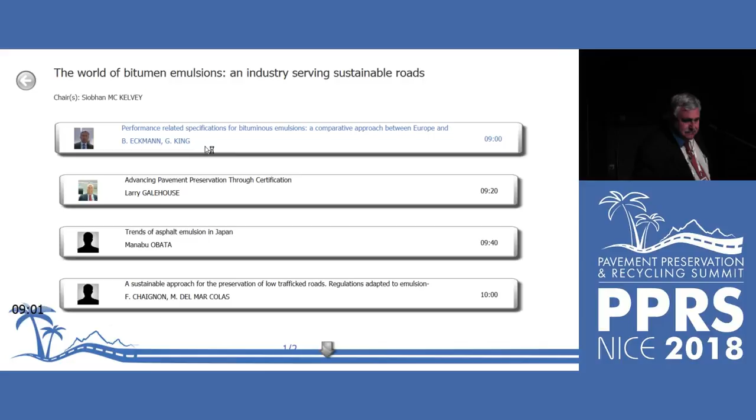the three main initiators of the PPRS event itself.

I hope you've had a successful few days so far. It's certainly been a very busy program, long days, but maybe you've also had a little bit of time to enjoy the beautiful city of Nice.

I'd like to thank the team at IBEF for inviting me to chair this session, entitled World of Bitumen Emulsions: An Industry Serving Sustainable Roads. It's a pleasure to be here. I know a lot of work has gone into making this happen, so thank you to everybody involved, and also to all the speakers this morning who are going to keep you animated for the next two hours, even though it's very warm in this room.

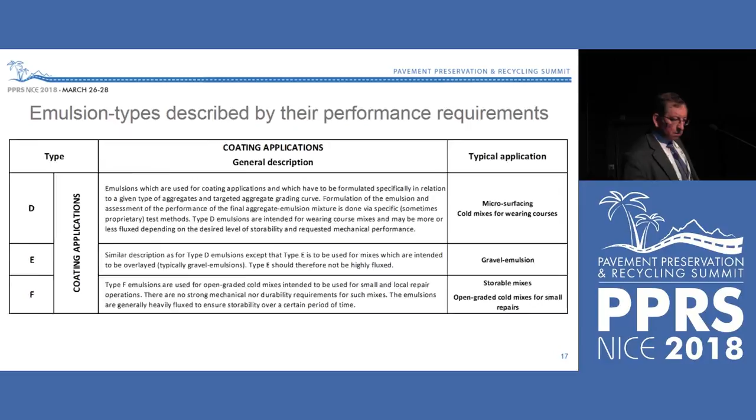I'd also like to take the opportunity, before we start, to remind you a little bit about IBEF and its mission. The International Bitumen Emulsion Federation is a platform dedicated to bringing together associations and organisations within its membership that are specifically related to bitumen emulsions from all around the world. It's committed to promoting and continuing the best use of emulsions, sharing information on experiences and best practices related to standardization, technical performance, health, safety, environment, and development of bitumen emulsion applications.

I know we had a great session yesterday in the Agora seminar. This morning you're going to hear more examples of best practice and sharing of information.

For those of you who don't know me, I was the acting president of IBEF for the last three years, but I actually ended on Sunday. I handed over my role to Galen Baumgardner. I can't see Galen, is he here? Are you here, Galen? No, not yet. Galen represents the Asphalt Emulsion Manufacturers Association in the US.

I was elected president three years ago at the very first PPRS in Paris, for those of you that attended that. I've learnt a lot. I think together we've achieved a lot, and I would like to thank again everybody in IBEF for the support they've given me over the last three years. But going forward, I'm sure that during his tenure, Galen will also be able to continue the excellent work.

So, for the next two hours, we're going to be looking at a very special world, the world of bitumen emulsions. For me, it's really important to have this focus during the PPRS.

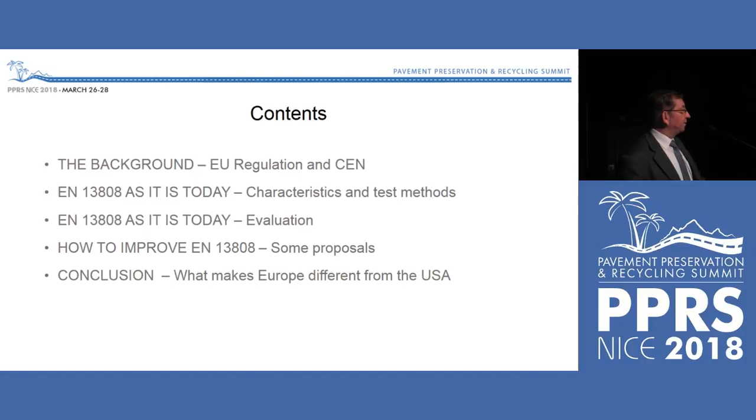We'll try to be as short as possible in answering the question of whether EN 13808, the European emulsion standard, will ever be a performance-related standard. To answer that question, we will first explain the background, show EN 13808 as it is today, make a critical evaluation, propose some improvements, and finally try to answer the question.

The background is the European Construction Products Regulation, which applies to all EU member states. Its main objective is to remove barriers to trade by putting construction products under the so-called CE marking process. An underlying driver is that construction works must satisfy a set of up to 7 basic requirements.

To enforce this regulation, the European Commission has given mandates to CEN, the European Standardization Committee. For road construction products, it's mandate M124, which identifies the basic requirements to be considered for bituminous emulsions. The task of CEN technical committees is then to propose essential characteristics and test methods by which you can fulfill those basic requirements. That's the answer to the mandate on which the product specification is finally built.

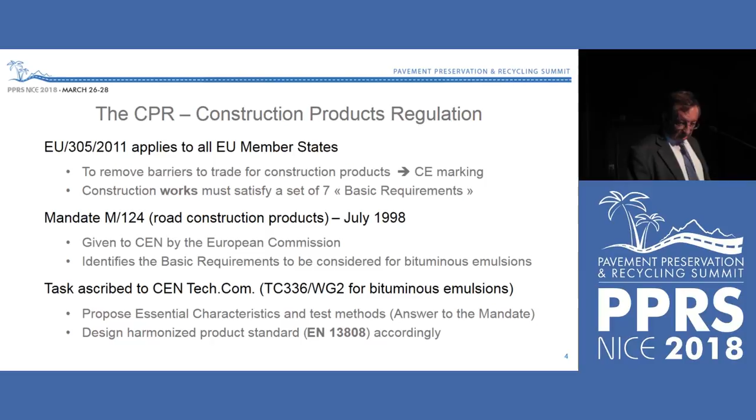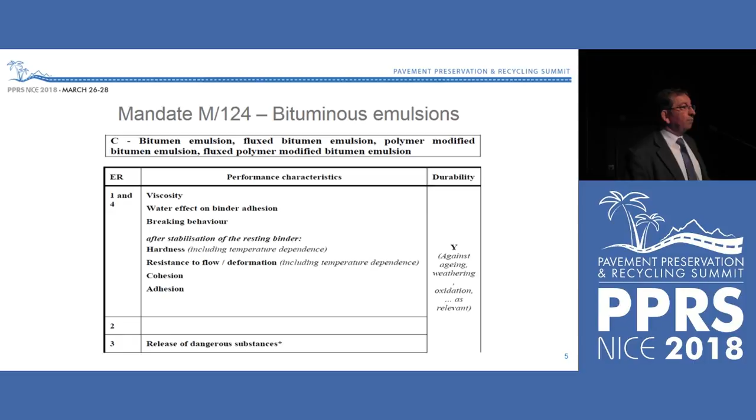This is an example of how it looked. This is the mandate, and here you can see requirements on the emulsion, viscosity, and so forth, and mainly mechanical requirements on the residual binders, including durability.

That brings me to the description of EN 13808 and to explain what these essential characteristics are, which have been identified in the answer to the mandate. Some relate to the emulsion as such, like viscosity or breaking behavior. There are also the so-called filler tests.

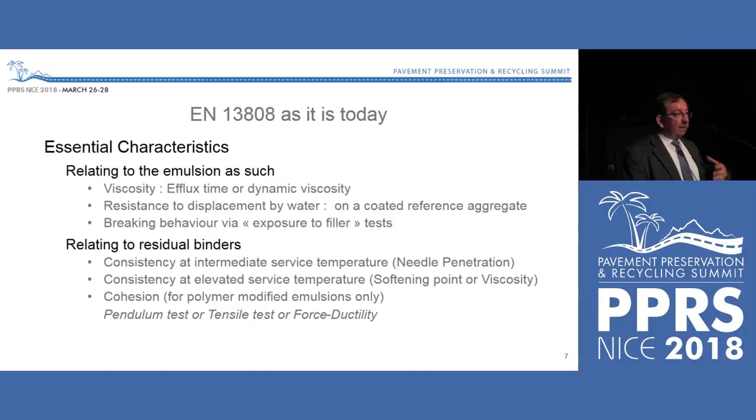Most relate to residual binders, mainly requirements on consistency in relation to temperature, and also cohesion for polymer-modified binders. Nevertheless, there is a refinement in that these residual binders are considered at different stages of the emulsion's life.

The first stage is the product once it's on the road. You have sprayed it, laid it, and the water comes out. This is reproduced via a so-called plate curing test, and this binder is assumed to be the initial binder just once on the road.

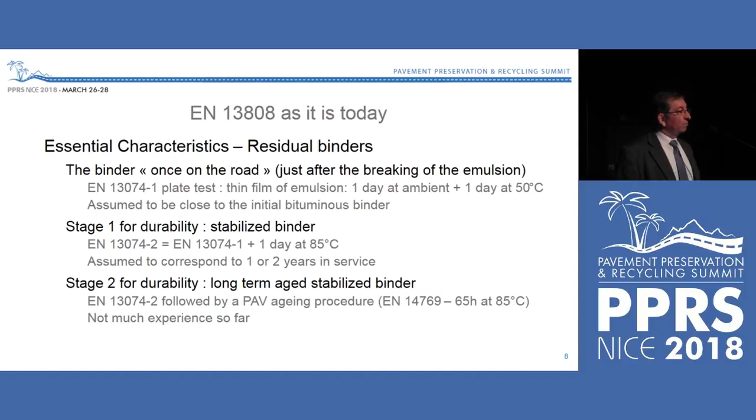Then you enter into two possible stages for durability. The first is a stabilized binder, obtained by continuing the previous procedure for a further day at 85 degrees C. Stage 2 is where you long-term age the binder via the well-known PAV process. Unfortunately, so far there is not much experience with this one.

Beside those essential characteristics, EN 13808 also includes voluntary characteristics, some not directly related to the mandate even if they may be compulsory, like binder content or sieve residue. Others may just be selected at a national level, such as storage stability and settling tendency.

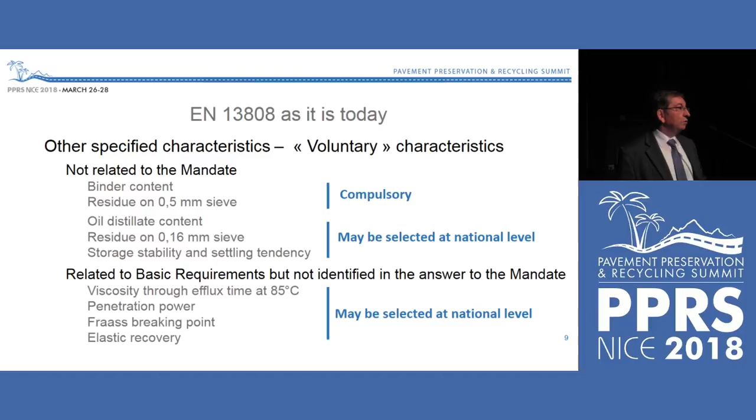Funny enough, there are also some voluntary characteristics which have been introduced and which should actually be related to basic requirements, even though they have not been identified in the answer to the mandate. That's the case, for instance, for low temperature behavior like Fraass breaking point or cohesion, or elastic recovery.

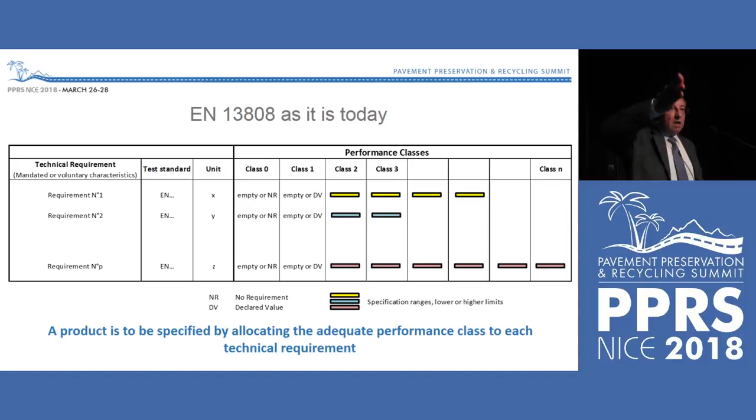This brings us to a standard with another particularity: it doesn't look like a normal product standard where you identify each product through a column, each column corresponding to a product. In this case, what we have are the different requirements as part of a final table. Each line corresponds to a requirement, and for each requirement you may have several classes of performance. A producer may then identify its product by stating which performance class it belongs to for each required property.

This is the result of the wish to harmonize everything that existed in Europe. And that was the only way to arrive at a general consensus.

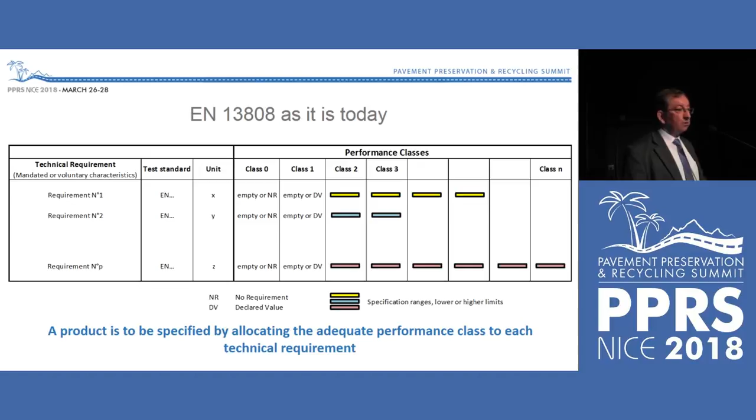Now we can be a little critical about EN 13808. One has to say that there are, in my opinion, some structural shortcomings, in the sense that the difference between voluntary and essential characteristics is not that clear. For instance, binder content and sieve residue are in fact very important, yet they are not mandated. We have also introduced some characteristics which seem to be voluntary when they should have been part of the answer to the mandate and considered an essential requirement.

In addition, for each essential characteristic there is a possibility for several test methods. That was also a result of the necessary need for consensus, but it's not according to the initial rules, which normally say there should be just one test for each essential characteristic.

And that explains why there is so much flexibility in the standard, for instance, with the possibility to have the no requirement performance class, so that people are not obliged to do something which they are not used to do.

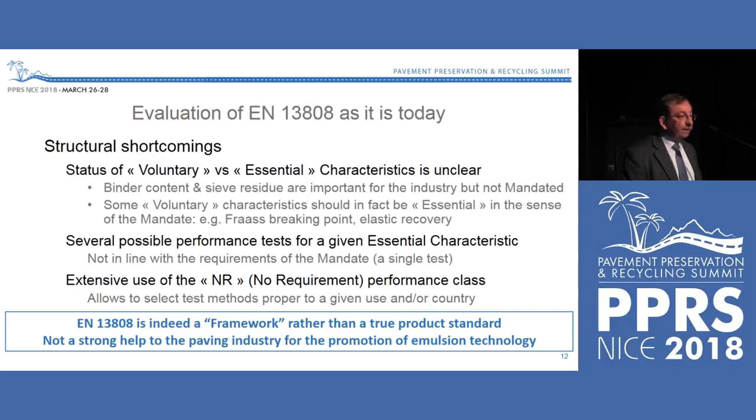So in this sense, EN 13808 is indeed really a framework, but it's not a product standard in the sense that it gives straight and well understood guidelines. And because of that, we could say that it's not really a very strong help to the paving industry for promoting emulsion technology. And another problem is, of course, test methods.

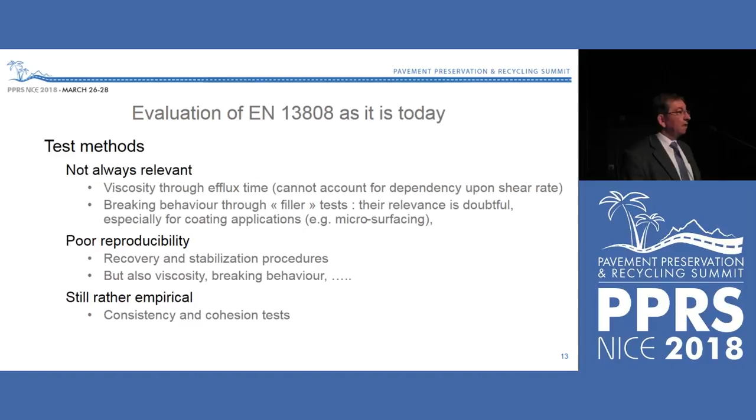I will not go into the detail, but many of them might be seen as not necessarily fully relevant. For instance, breaking test with filler. Many of them, if not all of them, suffer from poor reproducibility and are often blamed for that. And in relation to the goal of performance-related specifications, these tests are also still empirical rather than fundamental.

Now you can say, what are you doing? You should do something about it, you should improve it. Yes, of course, there are possible ways to improve it. And we had some kind of a thinking exercise in our committee and came to some ideas which are well understandable.

The first one being that the structure of the standard should be changed and specifications related more specifically to intended uses. And that would also allow that essential characteristics would be better defined in relation to the intended use, which would be, of course, much clearer for producers, contractors, and road owners.

We would, of course, keep the distinction between recovered, stabilized, and long-term aged binders, as well as introducing some additional operational parameters, such as, for instance, sieve residue and storage stability. That's, in our opinion, essential for producers.

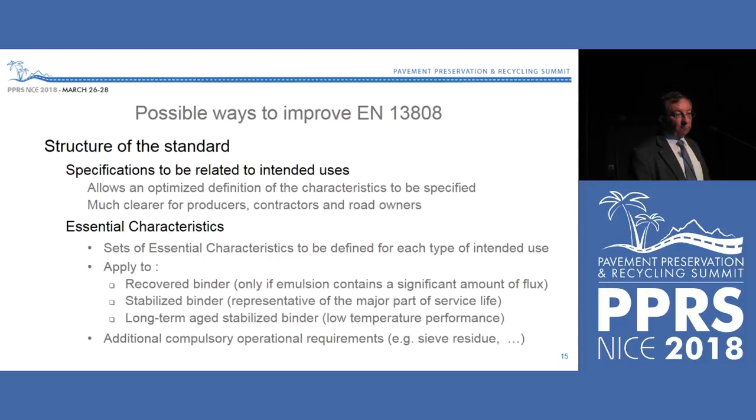And just a few words about defining intended uses. Of course, you can easily say there are emulsions for surface dressings, for tack coat, and so forth. But it's not enough to just say that. I think it's more important and interesting to identify for each of these applications what are the requirements it implies for the emulsion as such, and the residual binders.

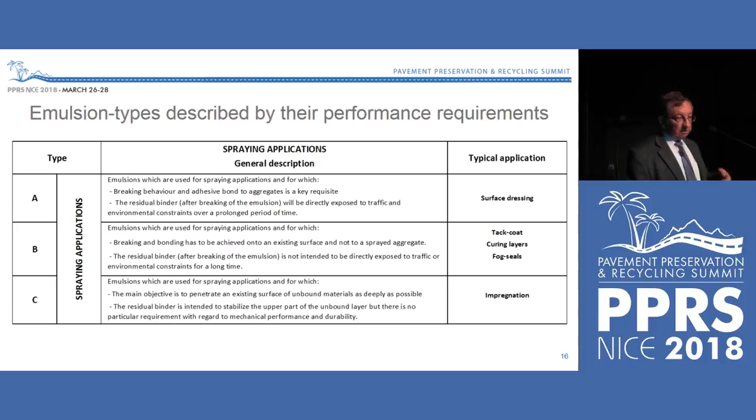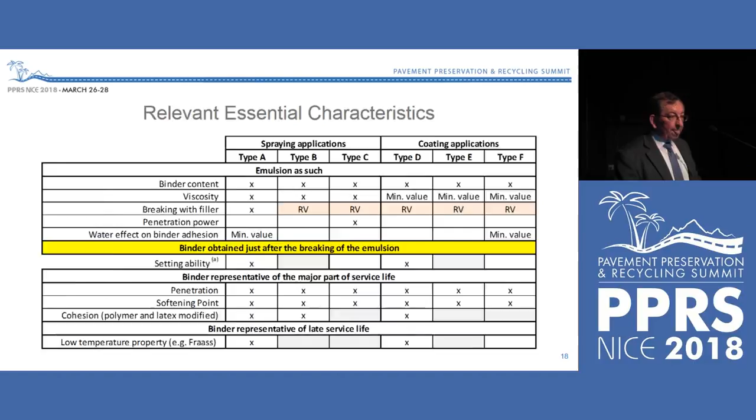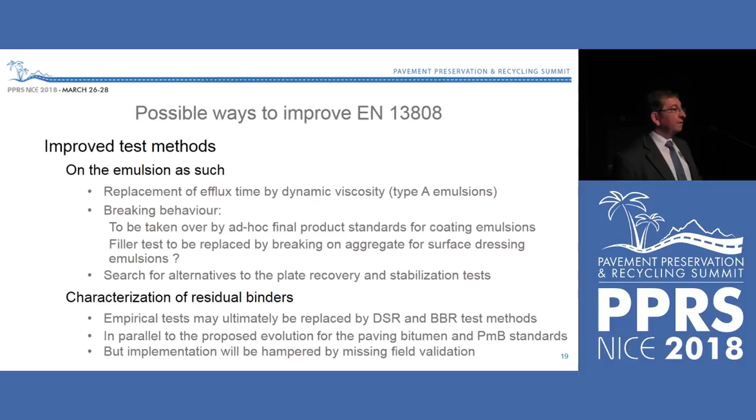However, this will not work if we don't also work on improved test methods on the emulsion as such. I was speaking about the relevance of breaking behavior. Efflux time, for instance, should be replaced by dynamic viscosity measurements because it allows you to take into account strain rates. And of course, characterization of residual binders, as Dr. Beckmann will explain later on, should be done via fundamental tests rather than empirical tests.

So there are possible ways to improve. Will we be able to do that? That is my last two slides. So will we ever get to this?

Of course, we can say that European harmonization does indeed consider performance. We have been speaking about basic requirements, essential characteristics. The problem we are facing now is that these requirements have not fully been answered, or not adequately answered, in the sense that there is insufficient consideration of end-uses.

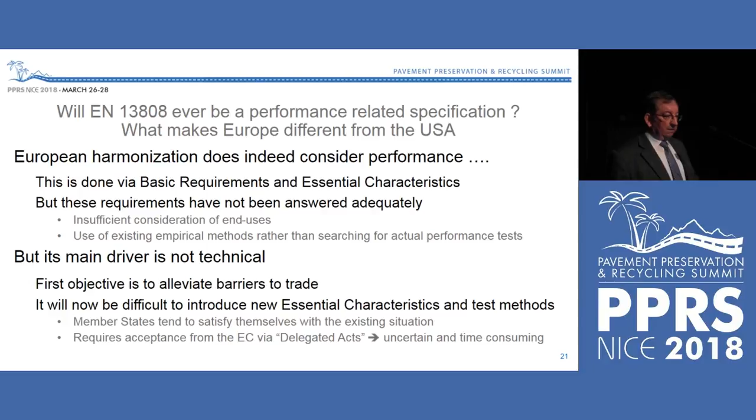We have not the right methods. The problem, however, now is that since the driver of the standard is not so much technical, but the first objective is to alleviate barriers to trade, we will now face important difficulties to introduce new essential characteristics and new test methods, since the European Commission is likely to consider those as imposed new burdens to producers.

And so in order to be able to introduce that into the regulation, we will have to bring the Commission to issue so-called delegated acts. And this is a process for which we don't know exactly how it will work and how much time it will require. And unfortunately, we have not yet been given the kind of silver bullet which could help us in getting out of this quagmire of regulations.

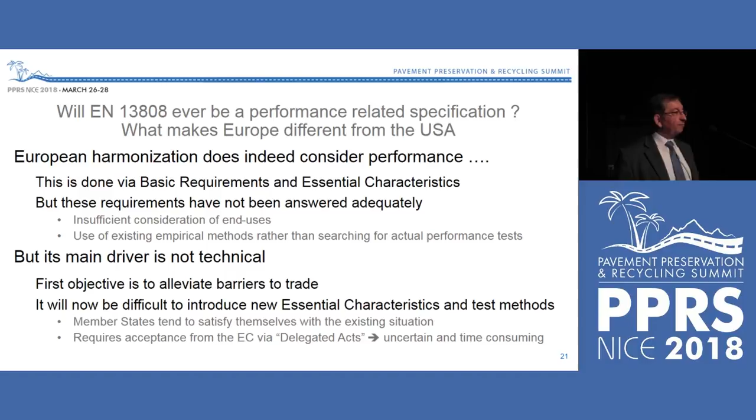And finally, there might be, as you will see, limited money available in the US. The problem is that in Europe there is no money at all, meaning that there is no pre-normative research on emulsions which could allow us to have better test methods, and there would be even less money available for validating those methods and those performance criteria against in situ behavior.

So in Europe, we should be optimistic about getting some progress. However, we have to be very conscious that it will be difficult, first because we need to convince member states and the EC to agree on new performance indicators. And second, I think it will only be the paving industry which will be able to invest and find the

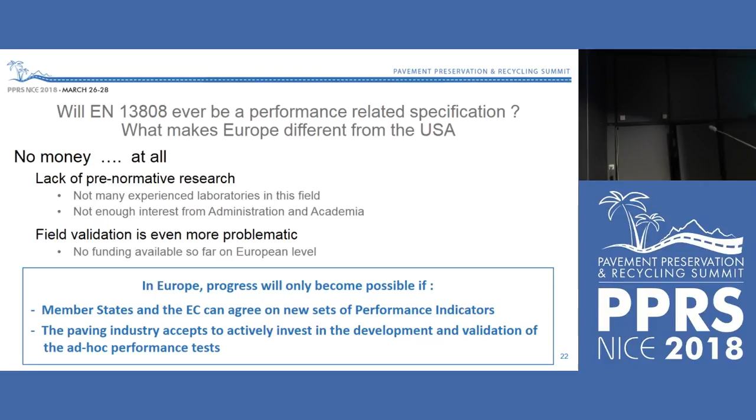Thank you, Bernard. I'll be trying to summarize in 10 minutes about 4 research projects, each of which were worth about $1 million, and about 10 years of work by the Emulsion Task Force to try to advance the effort to create performance specifications in the U.S. We're kind of on the back stretch on this.

Our first goal was to have a chip seal performance-related specification in AASHTO format submitted to AASHTO by, if possible, this fall, maybe next spring, and all the work that's going on to try to make that happen. So things are moving forward.

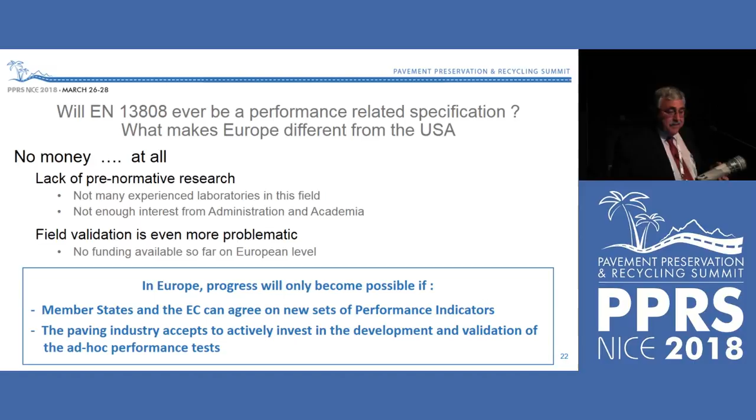The Emulsion Task Force that drives this process and who's funding it, a kind of cohesive plan overall of how we see the entire system going for at least 12 different emulsion applications.

So my talk and our work is mostly chip seals right now, but the process has to include many other materials as well that will ultimately fit within the same test equipment, same test methods, same recovery methods, and same system. And finally, as far as I can go before Madam Chairman pushes the trap door and makes me disappear,

I do want you to know that page 46 of the RGRA book you received, the February-March edition, has Bernard's introduction to his work, and my work is on page 54. So for all the technical details, I will skip.

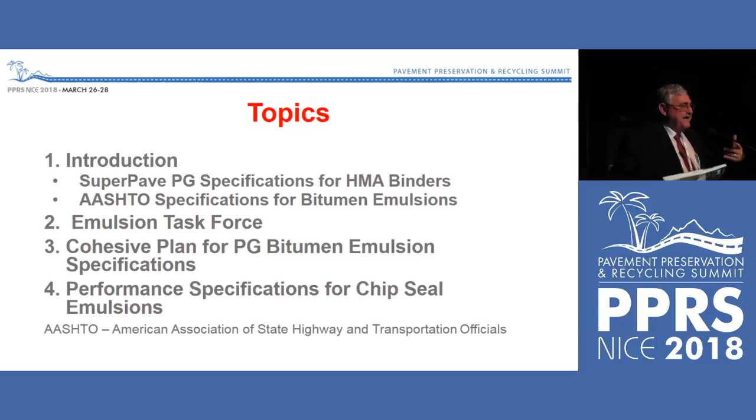Please refer to this. So with that, the SuperPave, of course, has a PG binder specification, and that's what we're really trying to replicate primarily, but recognize we're also trying to do all the other things that are part of a performance system, that is the mix design requirements and the performance testing. In the case of SuperPave, the mix design uses an SGC gyratory, taken much from the French system with the presse gyratoire. The performance testing, initially it was rutting, stripping, thermal cracking, fatigue cracking.

We've added an additional performance criteria. We found out that surface aging is a different failure mechanism, and we're looking at new specifications in the direction of changing rheology to understand brittle failures. You can see some of the papers by myself or Jeff Youtcheff that talk about that. So some changes are coming, and the test methods are also changing over time.

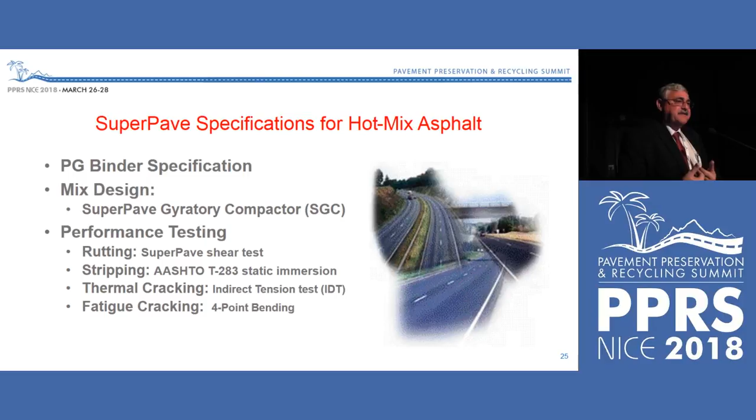But the important thing is the failure criteria; what we're after in performance is what's important. If you define the failure criteria for an application, then you can choose and adapt the test methods to fit as best you can with the failure criteria you're trying to match.

For example, in the binder specification from the hot side, we've got the Brookfield for mix and compaction temperatures, a dynamic shear rheometer test at high temperatures to define rutting that's now changing from the original G*/sine delta to a MSCR, multi-stress creep recovery test. So the tests are changing, but the tool's the same.

The software is different. At intermediate temperatures, we had a parameter called G*sine delta. It was supposed to be a fatigue parameter. After 20 years, we found out that didn't work, and pavements are cracking because that allowed too much recycled engine oil, and that was a really bad thing.

And so that's one of the things we're working on, trying to understand cracking in the context of rheology. And with black space, we're getting there. You can refer to some of those papers elsewhere.

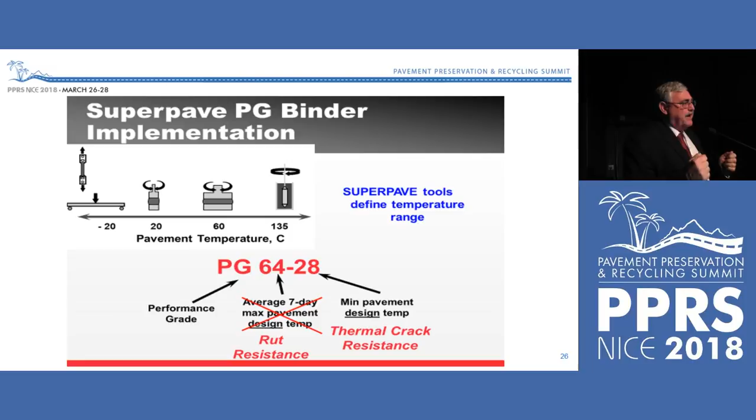And at low temperatures, originally we had bending beam rheometer and direct tension tests, but we're finding out that we can run dynamic shear rheometers now with 4mm plates and get the same low temperature information for rheology. We can run bending tests and other things that are more convenient than the DTT to get failure strain. So the tools are changing, but we're after the same physical properties. We're just trying to make the tools easier and more reproducible so we can put them into specifications.

For emulsion specifications, AASHTO, the Association of State Highway Transportation Officials, is the relevant body, not ASTM. AASHTO has 3 emulsion specifications: one for anionic, one for cationic, one for polymer, covering slow setting, medium setting, rapid setting, and quick setting grades.

If you go into the emulsion test laboratory, you see every bit of that equipment is 80 to 100 years old. We need a sign that says antiques from asphalt testing and isolate that lab as a museum, then start over with new emulsion tests.

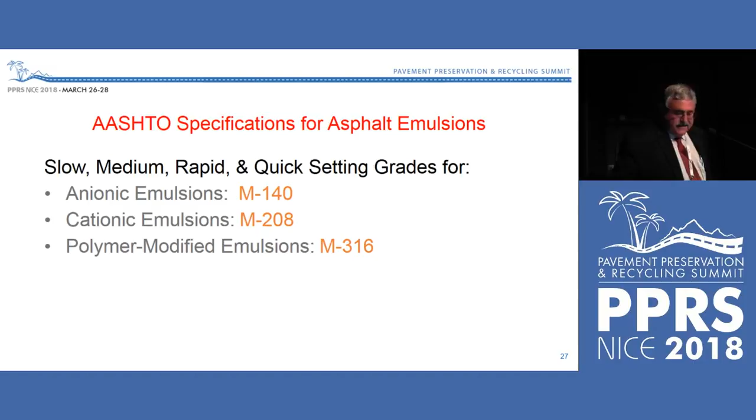So I'm not going to talk about what we do now because it's really inappropriate to performance testing.

The Emulsion Task Force was appointed by FHWA, but now is being supported by AASHTO through the TSP2 program. It's a group of experts led by Larry Galehouse and Jim Moulthrop and others, including at least 2 members in this room who have really been the drivers to make this happen.

Initially, we're trying to take all of the AASHTO specifications at all levels—material, design, performance, and construction specifications—and just rewrite them and bring them up to date. That's mostly been done.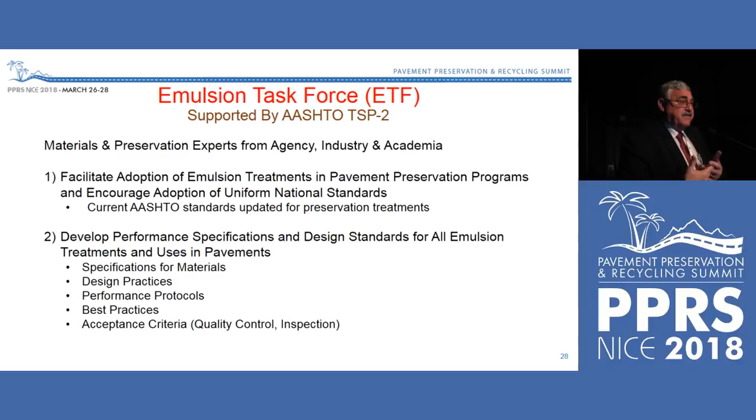The primary effort was to develop performance specifications and design standards for all emulsion treatments. So far, we've identified 12 different emulsion treatments in that category. What I'm going to talk about primarily is specification for materials, that is the emulsion specifications for both the liquid emulsion and the residue.

First, to do this new system, we have to start with a plan that anticipates how we're going to develop a system that includes all those 12 different applications.

We have to have one single common residue recovery method. And it can't be the distillation method of the past at really high temperatures. We want a recovery method at a temperature similar to what we have on the pavement.

In fact, the Europeans are far ahead of us with the 50-degree forced draft oven, and we're using 60 degrees instead of 50. We're using a very, very thin film that gets us residue in 6 hours instead of the 48 hours required for the European method, so we can turn around information faster—primarily because we're turning over emulsion tanks every day when chip seal crews come through.

We can't wait weeks for this information. We have to find ways to speed up our recovery process, and this is one way of doing so, but it delivers very little material because the film is thin. So we can get the water out, but that means we don't have much residue to test.

So all the tests we currently use don't work anymore because we don't have enough residue, and we don't want to heat and pour the residue. We want to test the residue as it cures, at 60 degrees C or less. So now we have to totally rethink everything we're doing to test and specify residues in the context of a recovery method that gives us limited material, and we never want to heat over 60 C.

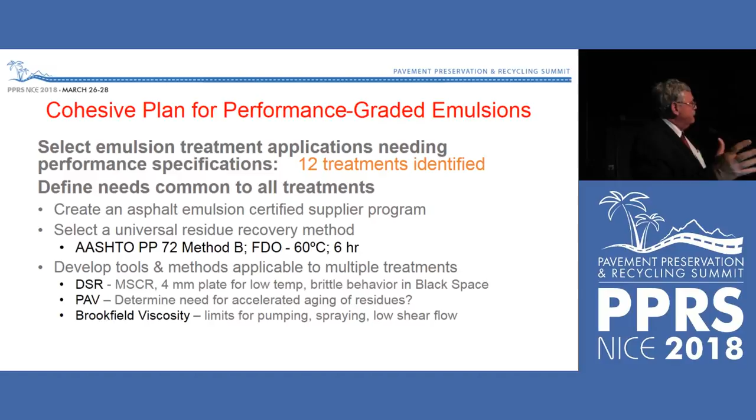We're not sure, so we're testing materials with and without aging to try to understand whether aggregate loss over the long term is due to asphalt aging for chip seals, for example. And finally, Brookfield viscosity - we're using the multi-shear rates that my esteemed colleague Bernard discussed earlier to try to understand different things.

This plan then has to look at each individual application and understand what the performance criteria are. For a chip seal, for example, it's bleeding and aggregate loss. Each of the other applications - cold in place, cape seals, fog seals, whatever - each has its own performance criteria that have to be defined. We have to develop the test methods and tools and the threshold values for specifications for each of those. And finally, we have to figure out how climate and traffic figure into this.

Remember, in performance, rheology is temperature dependent and climates are temperature dependent. So either the threshold values or the test conditions have to adapt for the climate. That's the primary key to performance-graded systems that are not in our system at all right now.

And finally, we need to validate and implement, and we also have to do all the mix design performance testing on the emulsion side that we did otherwise. I'm not going to talk about that because that's not part of emulsion purchase specs.

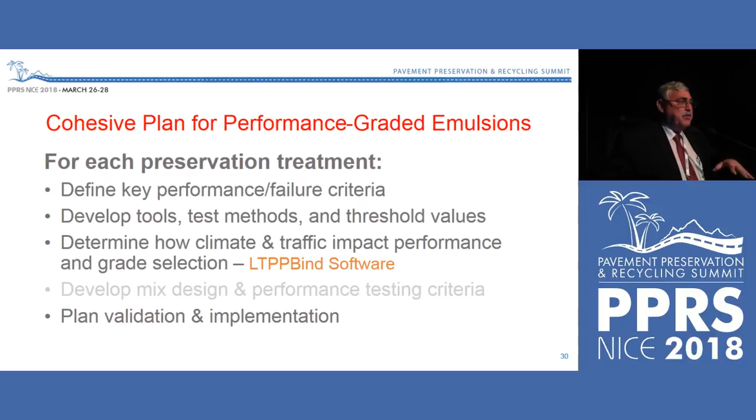So for chip seals, where are we? First of all, we're trying to develop lab tests that are performance tests for chip seals. We have bleeding, so Richard Kim used an MMLS3 traffic simulator to simulate traffic, and then he uses image analysis to determine how much bleeding you get for different application rates, at different temperatures, for different materials, when you use polymers, more traffic, whatever.

All the performance criteria - he can measure image bleeding, and therefore we can make decisions on the rheology of the material at high temperatures where that bleeding doesn't happen. Same thing for low temperature with aggregate loss.

He's looking at a number of tests, including the Vialit ball drop test. And we don't know if we need moisture damage testing or not for chip seals, so we can condition that ball drop test material with moisture, or we can do it dry. And we can now try to understand what performance is before we then try to develop our test methods for the binder to simulate and give us the performance we see in these mixes.

Construction time to traffic is important. The sweep test is one good thing - we can run the sweep test after however much time we allow it to cure after we apply the aggregate, and get some idea. That's especially important for when we use polymer modification for heavy traffic chip seals.

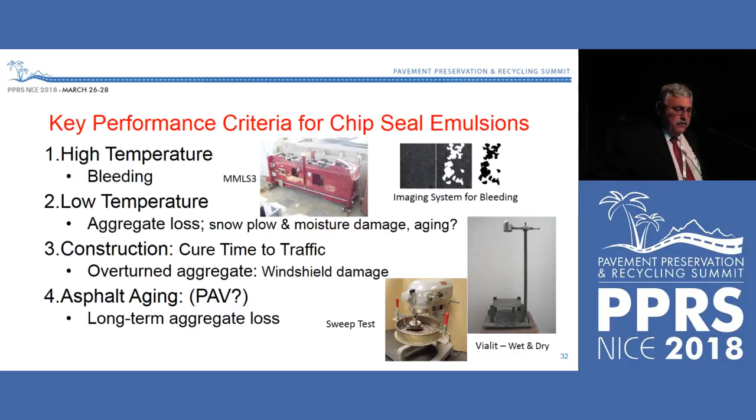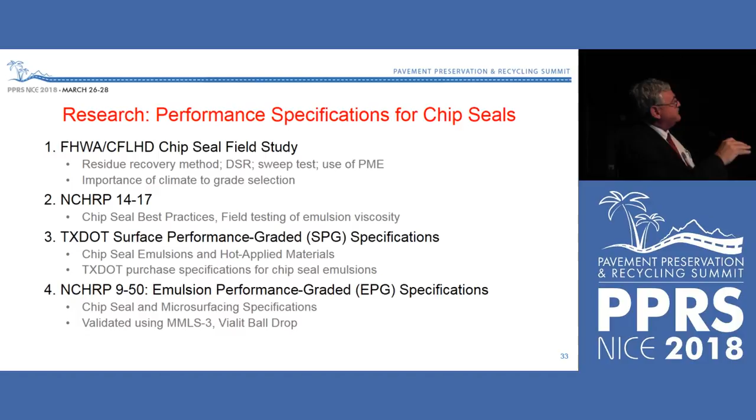And finally, the aging issue - again, really struggling with whether we need a PAV long-term aging test for residues or not. There are 4 research projects to refer to: one headed by the National Center for Pavement Preservation, done for FHWA and federal lands, looking at different possibilities for test methods; a chip seal best practices study from NCHRP that developed field emulsion viscosity testing because we feel it's more appropriate to test viscosity in the field as materials are applied; and then 2 specifications for chip seal residues that have already been turned into AASHTO from 2 different research projects. TxDOT spent over $2 million developing their own system that they're using now for all of their chip seal projects, and an NCHRP project done by Richard Kim and Hussein Bahia at North Carolina State and University of Wisconsin.

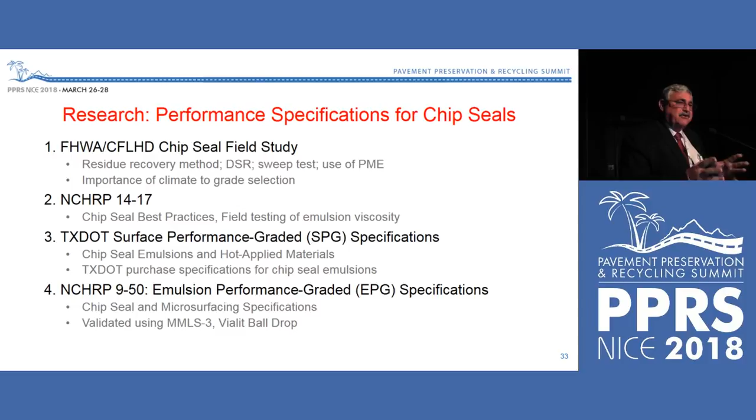Those reports are all out now, many publications, and in this case we're talking about SPG, in the case of Texas surface performance graded specifications, or emulsion performance graded specifications, EPG. It's 2 different solutions to the same problem, with totally different tests, looking at the same damage models and trying to simulate those with different test methods. We're now trying to run a round-robin study of materials across the country to sort some of that out.

Of course, a performance system is based on climate, so we start with the climate maps and the pavement temperatures. One thing you recognize is for hot mix, all of our criteria use depths 20 mm in a pavement, but chip seals are on the surface - the pavement's 3 or 4 degrees hotter, so the grades change.

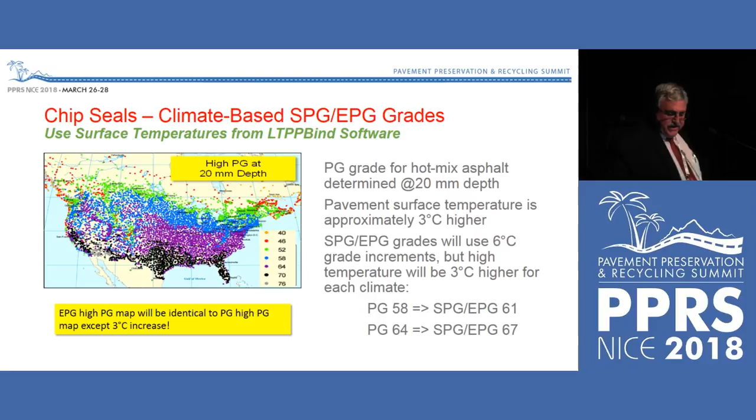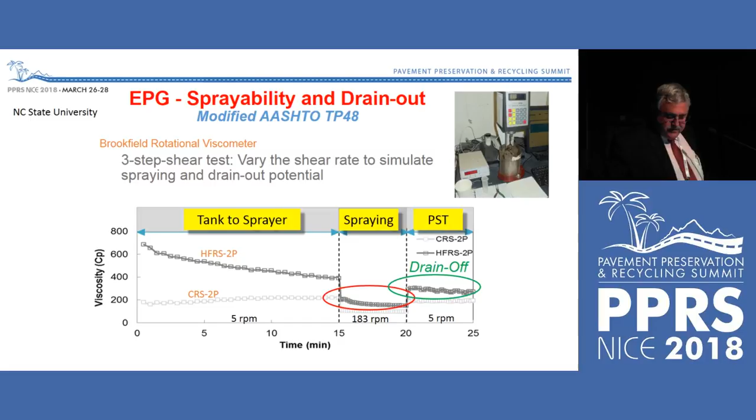There are a lot of different emulsion properties. Richard Kim has developed methods to look at shear rates in pumping during spraying, and finally the shear rates on the road - whether material runs off the road into the low areas or whether it stands up for cracking. So we have a much better perspective, as Bernard suggested we need, for using shear rate on emulsions. Storage stability - totally different thing.

We're looking at the top and bottom to see if we get sedimentation, using the toothpaste tubes we typically use for polymer modified materials. Also looking at what materials look like after a period of aging in the oven versus before, to see if we're getting any flocculation. So it's both sedimentation and flocculation or coagulation during storage that we're after.

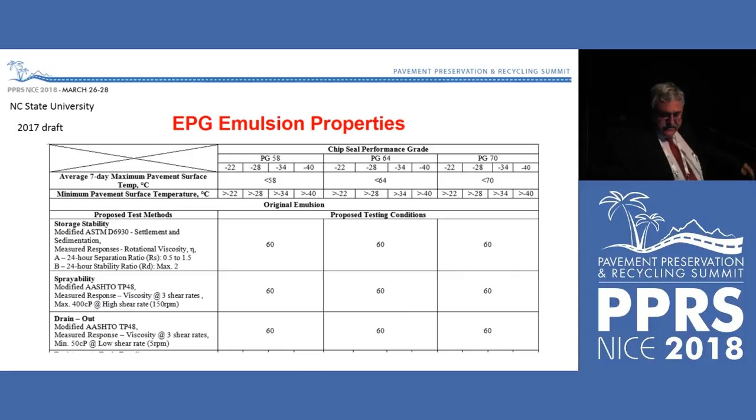Emulsion properties look something like this. Residue specifications looking at bleeding, aggregate loss, and how many grades we need for traffic. This is a really big issue because we currently have modified grades, polymer modified and unmodified, and we have 2 grades for any climate.

The research is proposing we have 3 grades: low, intermediate, and high volume traffic chip seal emulsions. The suppliers just want 2, because that means a lot of tanks and a lot more storage.

So there are issues here where the entire industry has to buy into this. We're going to AEMA and trying to get their buy-in, as well as other groups, to understand whether some of these decisions the researchers tell us we should make are in fact implementable by industry. So it's a joint effort.

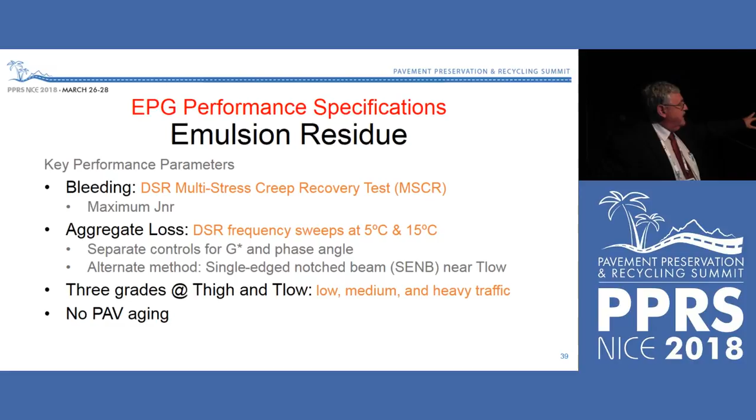In this case, for EPG, there is no PAV aging, and this is what the residue specification looks like. It's in the paper, so I won't go through it.

The SPG, the Texas work, is looking at G-star over sine delta rather than MSCR. So they're using DSR for bleeding, but with 2 different tests.

For aggregate loss, they're using stiffness of materials, whereas the EPG specification initially used a single-edged notch beam and looked at fracture properties. Now they're changing to rheological properties, but using the DSR rather than the BBR, bringing phase angle and brittleness into the context, where the Texas specification does not do that.

So we have to decide among these options, as well as others being offered to us, which might be the best failure criteria. Everybody's after the same failure - it's the test methods we have to judge to see which delivers the right answer.

This procedure includes 20-hour PAV aging on the emulsion residue before we do the low temperature testing for aggregate loss, whereas the EPG system from North Carolina State did not. So there are more differences to work out.

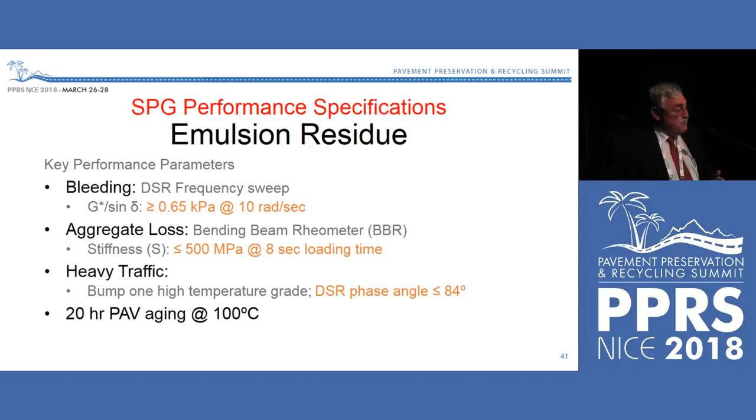This is what the Texas spec looks like. There are a lot of questions, challenges, and decision points.

When do we use polymers? Is it traffic driven, or is it when we use snow plows and need more fracture toughness? How do we specify polymers to make sure there's polymer in the emulsions where we want them? We use a lot of high float emulsions in the U.S., and we have to characterize high floats with a DSR, not as we traditionally have done. Dr. Dave Anderson is helping us do that.

Should low temperature properties vary with traffic? In hot mix, we only vary high temperature properties with polymer modification. We're not sure if low temperature properties should vary or not when we add polymers. Aggregate loss involves many, many issues.

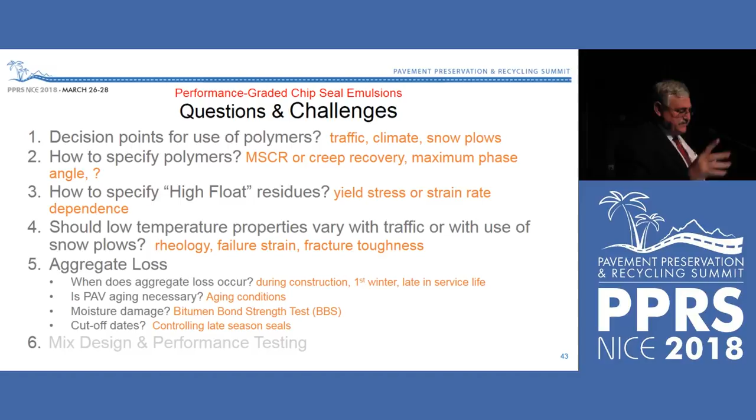Again, most of those are covered, Gail, in the paper.

Can I just interject - is all this information in your article as well? All but this last slide. And that's what I want to finish with.

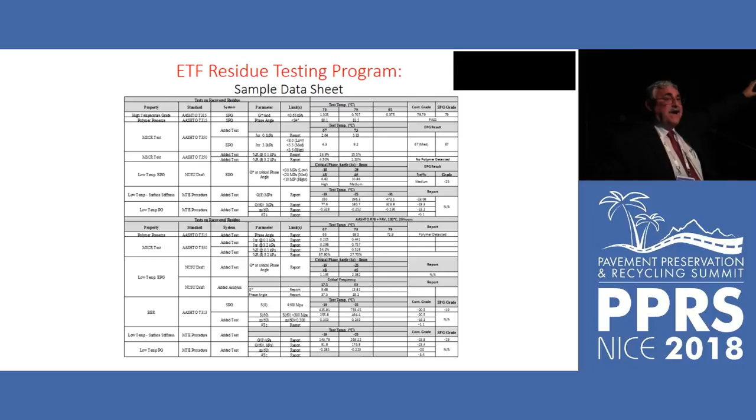So we have a big residue testing program going on right now. We collected emulsions from all over the country to test, and this one sample has all of this test information to help us answer some of those questions.

Finally, in terms of what Europe is doing versus what we're doing in the US, what we find is we're after the same damage. It's just the test methods we're using that are different, and the closer we can come to doing the same thing, using the best available test methods and rheology, the better chance we have of being successful.

With that, thank you, Madam Chairman. No, I ran over. There's a lot of information there. Thank you, Gail.